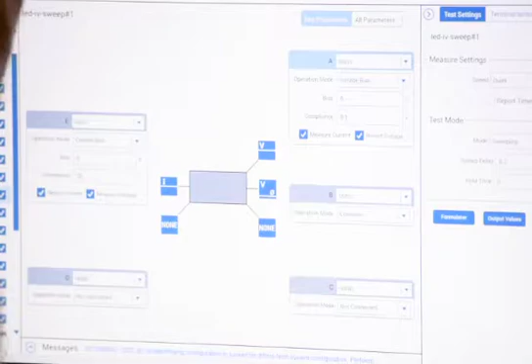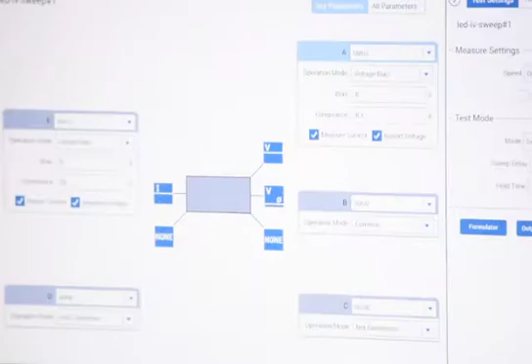So to make an SMU into a voltmeter, you have to source 0 amps. To make it into a current meter, you source 0 volts. That's how an SMU works. It always has to have a sourcing function. So if I want to measure a voltage here, I source a current. So I come here, source current, and I say current bias, and I put it at 0, and now I can measure voltage. Okay, now that's a voltmeter.

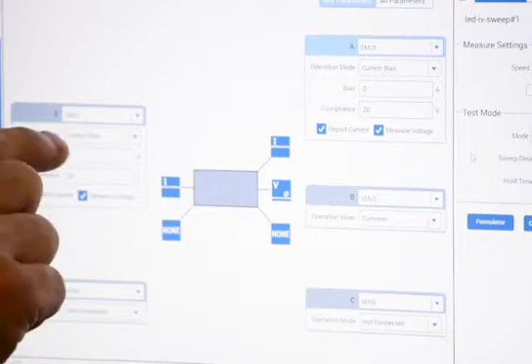And if I set up another pin to do the same, it'll measure them both at the same time. It'll apply your current bias and measure the two voltages at the same time. Perfect. For SMU1, for us, we do source current, right? If we want to inject current. So current bias, I didn't put anything in. We have to put something. It should not be zero. No, it should not be 0. You got to put something in there, obviously.

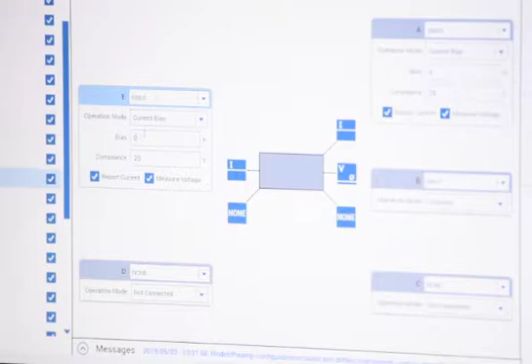You actually want to sweep your current, right? This instrument shines on sweeping. It's a sweeping instrument, okay? Which brings me to a point I want to make because a lot of people don't get this. The fact that it's a sweeping instrument, some of the things you're used to doing, you might have to change your thoughts on. For instance, everybody knows what auto range is, right? On a scope? On any instrument, right?

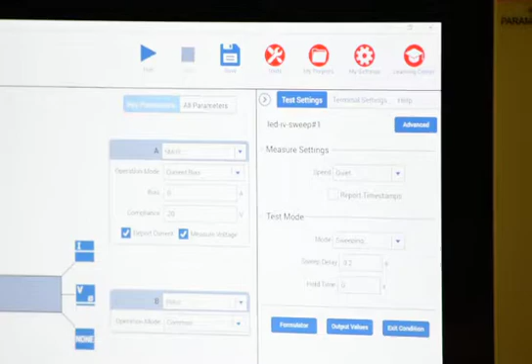Forget about auto range. Auto range is dangerous on a sweeping instrument, because when you're sweeping a measurement, sometimes you're gonna go through a large dynamic range, which is gonna cross over several ranges. The DCSMU has built-in delays that are range dependent. So when you change ranges, your timing changes. And what you're going to see in your sweep is a little blip, and you're going to call me and say there's something wrong with my system. Well, no, it's working fine.

It's that that range change takes time. So it's going to interrupt your nice, beautiful sweep, and give you some artifacts that you're going to think are wrong. They're not wrong. That's the way it's supposed to work. Because the lower the range, the longer it takes to settle the measurement. So there's delays that are built in. It's because of Johnson noise. You familiar with Johnson noise? You're not familiar with Johnson noise?

So what Johnson noise is, any conductor has some inherent noise because of the movement of the majority carriers, usually electrons, in the material itself. Even in a steady state, there's movement of majority carriers in the material. That's noise. And if you're trying to measure small signals, that noise can swamp out what you're trying to measure. So the smaller the signal, the more problem you have with Johnson noise. So you have to wait for the signal to stabilize.

So because of Johnson noise, there's certain measurements you can't make. The Johnson noise line, on the voltage side, is like this. So let's say you're trying to make a picoamp measurement in a picosecond, you can't do it. If you look at a Johnson noise graph, it shows you that it's not possible. So I need to increase the time? It's done for you, for the most part. That's why your sweeps will get messed up because of the timing change as it spans different ranges.

It will change the timing for you mid-sweep, which you probably don't want. Or maybe you do, because there's a consequence to that as well, because the instrument's always most accurate on the lowest range. So if you set a fixed range, you're going to have to set the fixed range at the highest range of your sweep, right? Which means on the low end, you're going to have less accuracy than you are on the high end. Because your accuracy is going to be based on the range you're set on, not on the measurement you're making. It's based off of the range.

So if you look at any data sheet on any piece of equipment, a DMM, a power supply, an SMU, it shows you all the ranges, and there's a different accuracy spec for every range, right? So your accuracy is going to change during your sweep, which you may be okay with, you may not be. And if you're not okay with that, then use auto range and deal with the blips in the data. You just have to deal with that. Or you can break up your sweeps into smaller ones, keep it within the range. Yeah, well, that's what you're seeing. Right? Yeah. Remember some blips. Okay.

So here we have set that to count, right? So the voltage per count. Yeah. So for the current, you should set another column for current to go to the ground, right? Well, it's going to flow from here to there. So no need to. That's another good point.

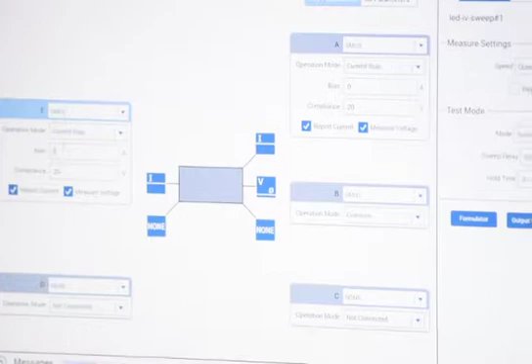Any of you guys use Keithley individual SMUs in the box? Like 2600, 2400s? Okay. That's the one you've used. There's a significant difference between those and this, and you should know the difference. The difference is those are floating. The grounds on those float. So you can put the ground above. You don't have to be on a ground potential. You can put it away from ground, up to 250 volts or some big number.

These aren't floating. Every SMU in this box is common grounded internally. So you cannot do an off-ground voltage measurement. You have to do a differential measurement. So you need 2 SMUs to do that, right? And you have to subtract 1 from 2. Does that make sense? Does it do that for you? You have to set it up.

There's a formulator that you can do the math with, and I'll show you that. The formulator allows you to post-process. It'll give you the 2 voltage readings in a separate column on your data sheet, but then you've got to write a formula that says, take V1 minus V2 and give me another column of that data. Or you can export everything and do it in Excel, but this has got some pretty powerful features. You shouldn't need to do that.

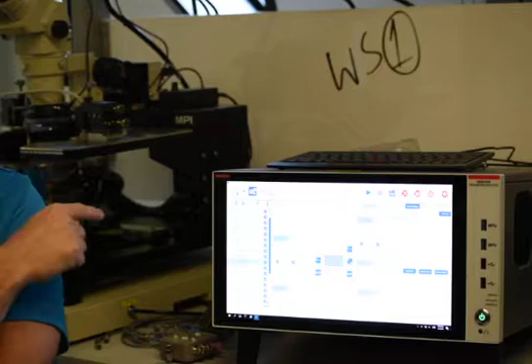The formulator is a very powerful feature that allows you to do a lot of neat stuff. You can find slopes, you can do line fits, you can do linear regression. You can do a lot of stuff right on the machine. Okay, so just make sure you understand that it's grounded.

That's why if you want to do Van der Pauw, anybody doing Van der Pauw? Yeah, we'll be doing some. If you want to do Van der Pauw, you need 4 SMUs to do it. You have to have an SMU on each pin, because you can't just put a ground on it. It's not floating, so you have to reference everything to ground. So you're gonna source a current across 2 points, you're gonna measure 2 voltages and subtract them. That's how you get the voltage across your material. So that's important to understand.

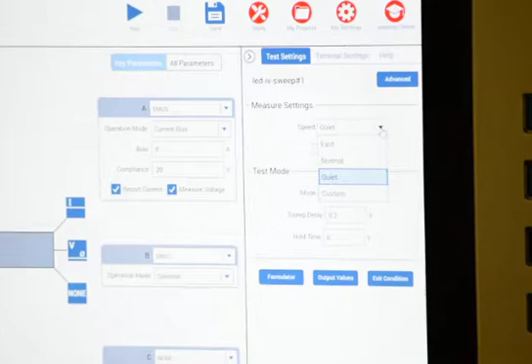Now, we're talking about speed and timing. For speed, we just give you fast, normal, quiet, or custom. We don't give you numbers, right? So there's an important thing to know here in that there's the source measure cycle. We call it an SDM. It stands for source delay measure, and all 3 of those processes have time delays associated with them.

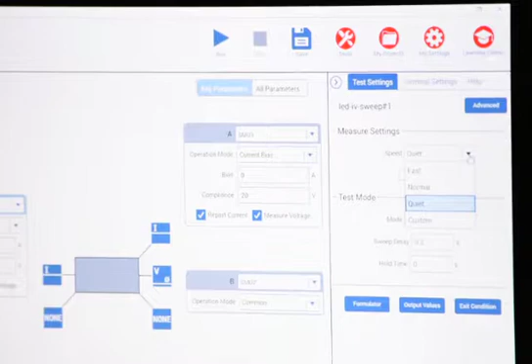The source, for instance, when you set a source value, there's the built-in delay we just talked about. It's range dependent. You can't control that. When you set a source value in a range, there's a certain amount of delay that comes with that. Then the delay portion is your delay. You may want to add more delay, so you can go in there and add additional delays.

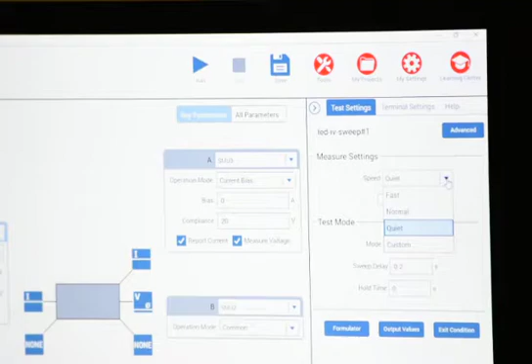Typically it defaults to 0, but if your device is highly capacitive, you might have to wait longer than the default delay, so you can add more delay. And then the measure has another delay as well, and that's what we're talking about here, measure settings speed.

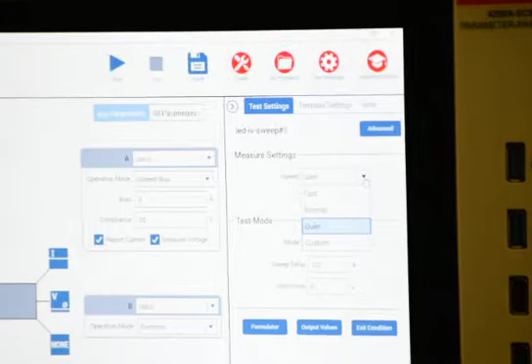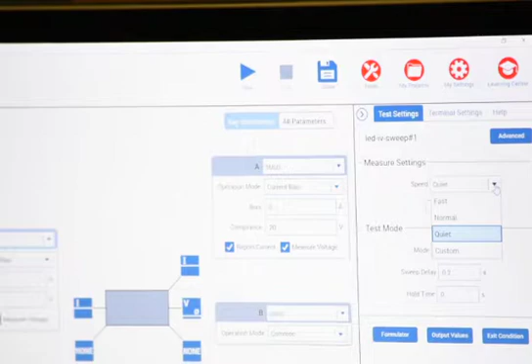So it uses an integrating A to D converter. What it does is it samples at a very fast rate over a period of time that you determine, okay? So we use the power line cycle frequency as the base for that integration. And why do we do that? Because most of the noise in your measurements is 60 hertz noise due to your fluorescent lights, right? So if we integrate over 1 over 60, 20 or 16.67 milliseconds, and we give you an average, we've eliminated 60 hertz noise. Make sense?

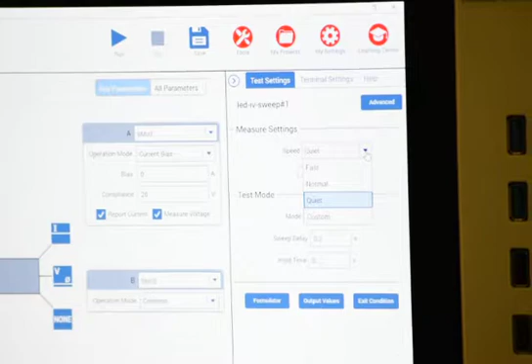Okay, so that's what normal is. Normal is 1 power line cycle. So if you're at 50 hertz, it's 20 milliseconds. If you're at 60 hertz, it's 16.67 milliseconds. So if you want a good, clean measurement, you probably want to be on normal mode, which means that you're not going to get a measurement any faster than 16.67 milliseconds. But you're going to get a good, accurate measurement.

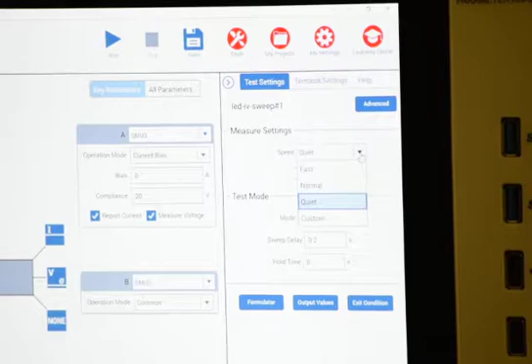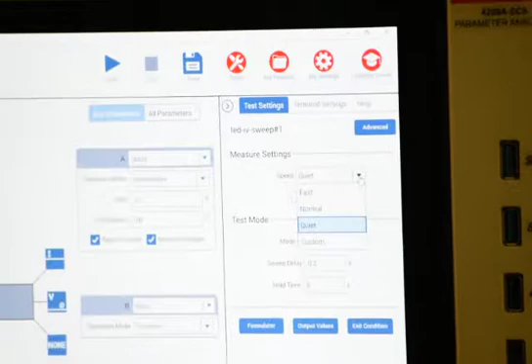If you want a faster measurement, we can set this to fast, and it'll go less than 1 power line cycle. I think it's 30% less. Custom allows you to set any value you want. Quiet goes 30% slower, right? So you've got to understand that's the A to D aperture time for the measurement. That's how long it's going to integrate, because all your measurements are riding on an envelope of noise on your ground that comes through the power line, right? So that's one way we can give you nice, clean measurements.

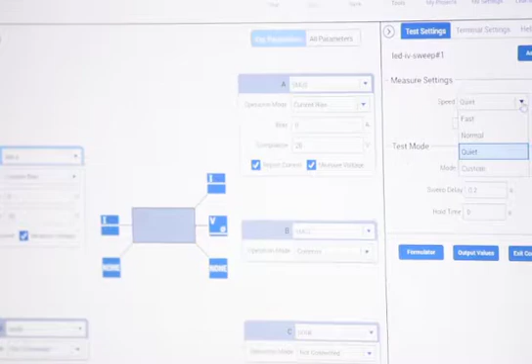The point here is that there's a trade-off between speed and accuracy, and it's just physics. We can't solve that for you. So you have to decide what's your tolerance for noise. If you want a very fast measurement and you don't care about noise, you can set this very fast. You can set the NPLC value to like 0.0001 or some real small number.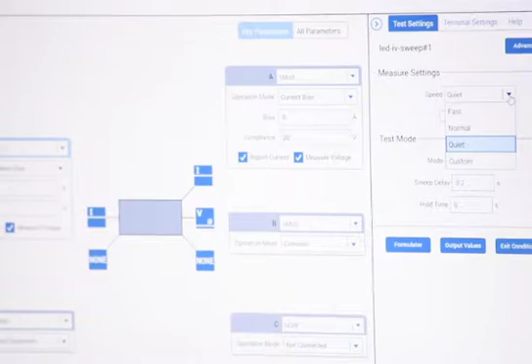And that's like a digital averaging, right? So now you get a real clean, stable measurement, because you can go multiple power line cycles. And that would be the custom one, right? Yes. So my point here is, for the most part, stick to normal. Why would you need to go faster?

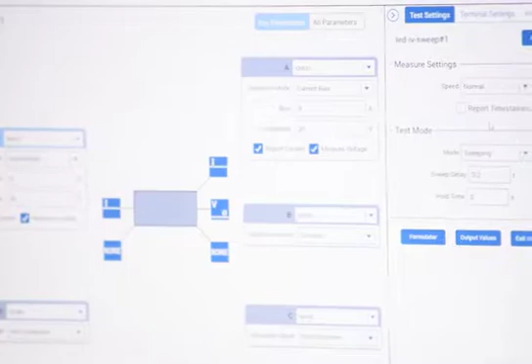What if you're in a production environment and you're on a wafer that's got 100,000 sites and you need to test every site, right? Every millisecond's going to matter in that case. Well, in our case, sometimes you want to check how good your probing is. You just want to really quickly run it, because the measurement is also slow if you don't have a lot of current, if you don't have a good connection.

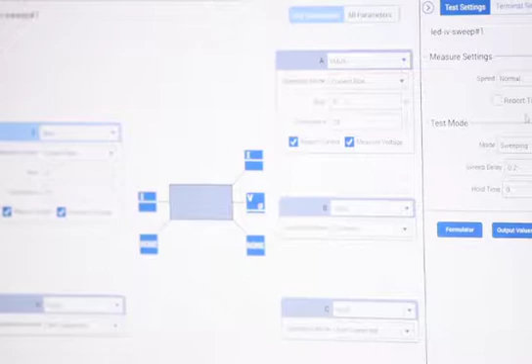Yeah, but in an environment like this, what's the difference between 1.6 milliseconds and 16 milliseconds? Is that going to really matter to you? Probably not. So wait longer and get a better measurement. Well, I'm saying when you don't really make a measurement, when you just want to see, am I connected to the device or not, stuff like that. But you're right, yeah. So you have the patience here to wait a little longer for your measurement, is my point.

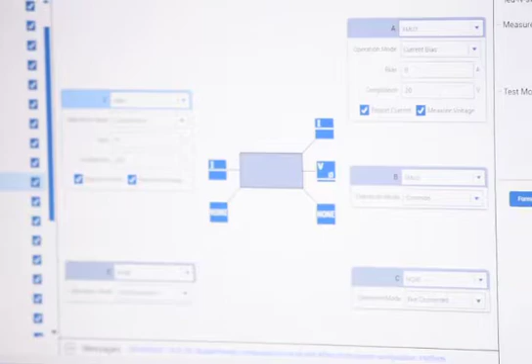Production people don't have that patience. They need everything as fast as they can. So before they figure out their timing, they're going to source a voltage to their device, measure the current over time, watch it charge up, and decide where do I need to take my measurement? Where's the earliest I can take my measurement? And they'll look at the timestamps and they'll put that in. That's what they'll do. Okay.

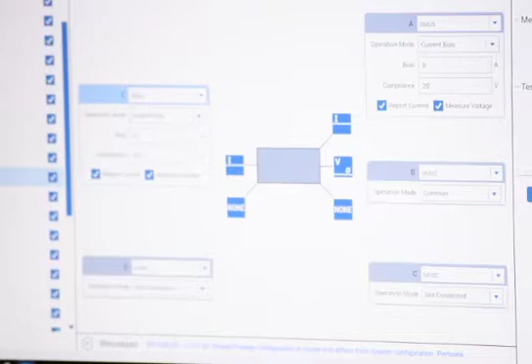For you, just let it go, because the longer you wait, the better the measurement you're going to have, right? Because it's asymptotic. Typically, they say you want it to be within 2% of the final asymptotic value to be considered a good measurement. But you put an edge on a device, the device doesn't see an edge. You know what it sees? It sees a charging curve, and it's not necessarily due to the device. Sometimes it is, but it's due to everything.

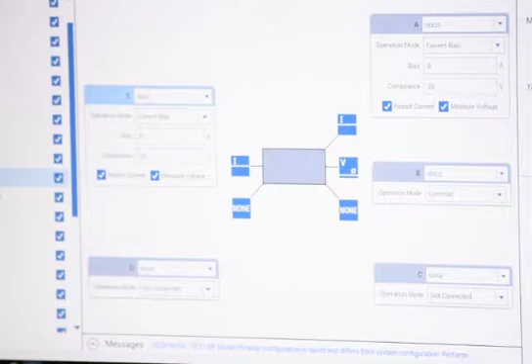It's due to the cabling. It's due to if you've got a chuck. A chuck is a big capacitor, right? So everything that's connected between your hardware and your device is contributing to that RC, the C portion of that RC time constant. That's why I say keep your cables short, right? Because every foot of cable has so much capacitance. The more cable you've got, the more capacitance you've got.

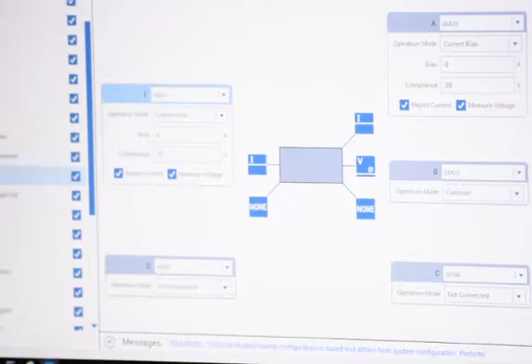I have a question. You said that you also have a problem with the connectors there. So is it better to use a longer wire and connect the probes directly to the SMU, or use another wire and connect them? Here's what's best. You have a remote preamp in the back here. I don't have it mounted remotely right now. It's designed to be mounted remotely.

If you have 4 remote preamps, here's the ideal setup. You've got the CVIV box. All your preamps are in the box. That's your measurement hardware, your A to D hardware. It's in the preamp, not in here. You put that right here, and then these cables go directly to the CVIV box. Now you've eliminated this cable completely, and you've eliminated this bulkhead. That's ideal. That's one of the purposes of the CVIV. It's designed to be put on your table right by your probes.

Most people, when they order probe stations, the probe vendor asks them how long do you want your cables? Oh, give me 2 meters. No, that's a bad idea. You want these to be short. I like to see them this long. You can also take the little black preamp on the back. We provide you a cable that can go between the SMU and the preamp, and you can bring just that preamp on here as well, lay it right here and have a cable this long.

If you're not measuring below 100 nanoamps, it doesn't matter. But if you're measuring femtoamps, attoamps, it does matter. We don't even do femtoamps. Maybe if you have off current of a transistor, then you can bring it out for one SMU, like your most critical one. Exactly, and you just put it there. You only have one preamp, so you would use that one. Okay, everybody understand that? That's the ideal setup.

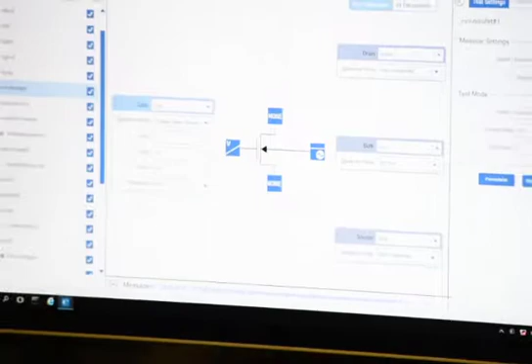So your point is that there's capacitance in everything that you don't want to be part of your measurement. We need to take that out. We need to reference that out. It's a two-step process. Make sure you get that, because a lot of people don't get that. You have to do the compensation. You have to enable the compensation. If you don't enable it, it doesn't happen.

So what you've got to do is go up here to Tools, and you see here there's Connection Compensation, and there's really 4 things that could need to be compensated. One is the cable length, because there's a phase situation here, right? If your cables are different lengths on your CV meter, you'll get a phase error. And if that phase error is greater than 90 degrees, it freaks out. Phase shift. Yeah, you get a mess.

So make sure you always use the same cables that we provide, because this is already set up for those cables. These are 1.5 meters. There's open compensation, short compensation, and then load compensation. Forget about load compensation. You should never need it. You would need open compensation if you're measuring small capacitances, and short compensation if you're measuring large capacitances. So for most people, all you really need is the open compensation.

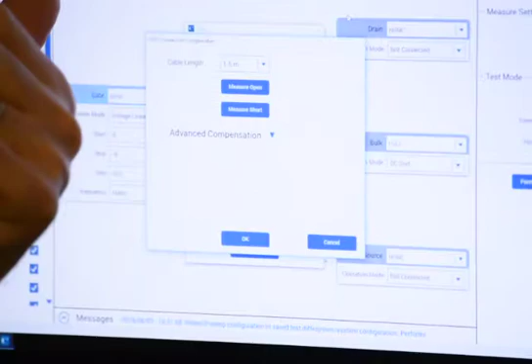So what you would do is have everything connected to where your device would be. You drop your chuck and you run that. So everything's cabled to your device. You're going to measure the capacitance that the system sees without your device being connected. And it's going to go through every range, every frequency, every voltage range on the CV meter. So it takes a little time.

It's going to run through all the ranges, measure capacitance, and store that internally on the card. That's all it's going to do. It's not going to reference that to any of your measurements. It's just storing the values. That's what this does. Once you do it, you should never have to do it again unless you change something.

Open was for low caps, right? Low caps, because the capacitance of your cabling and stuff is going to be low. But if you're measuring low capacitance, it could matter. It could affect your measurement, so you want to know what that is. If you're measuring a large capacitance, it's like a short almost, right?

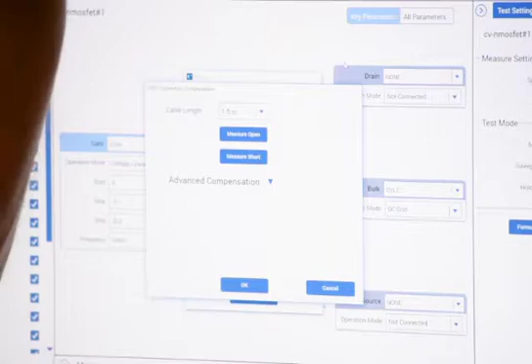So to do short compensation, what you've got to do is short your probes. What you basically do is just drop both your probes on the same pad and run short compensation. That'll measure the capacitance with a short. That's only if you're measuring large capacitances, microfarad type ranges. You can do them all, it doesn't hurt anything, but the short compensation really won't affect your small capacitance readings. So you can do them all, and then you can decide within your test which ones you want to enable.

So now that I've done this, the advanced compensation has the load, where you've got to put something like a 50 ohm load on, which we don't even provide because nobody needs it. Because this goes up to 10 megahertz, you don't need load at that frequency yet. Right. And you want to do this every time you change anything: if you change cables, add an adapter, or add some more cabling.

If you're always set up the same way, you do it once and you're done with it. It probably doesn't hurt to do it every now and then, just to be sure. Something might change. You don't know who used it the day before. You just do it at the beginning of the day. What's cool is do your CV test with the compensation and without. Then you can see the difference. That's usually an eye opener for people.

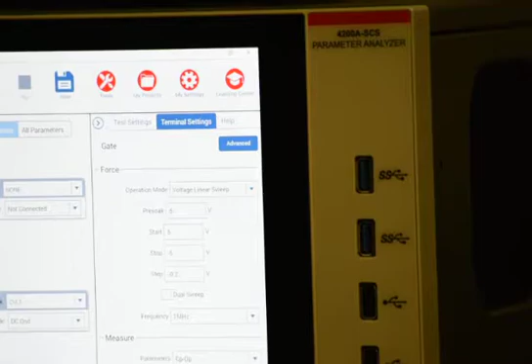So we do the compensation for the CV card itself, and then when we go to the test, over here is where we enable it. If I want to add open compensation to this test, I just check that, and then it will use the values that are on the card. Yeah, before you run the test, you just select open compensation. Does it hurt to just select both, even if you don't always need it, as long as you run them? As long as you run them, you can select both. You're on the safe side. There's no harm in doing that.

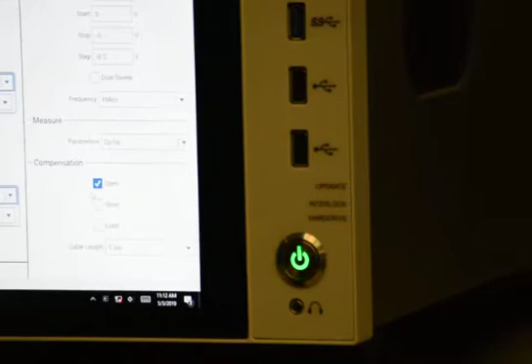Open is open and short, right? So basically you just select both of these, open and short. And then for this test, it will use those stored values that are on the card. If you don't do that, it ignores it. Make sense? And here, if you change cable length, you can actually do that here as well. You're familiar with the different capacitance models.

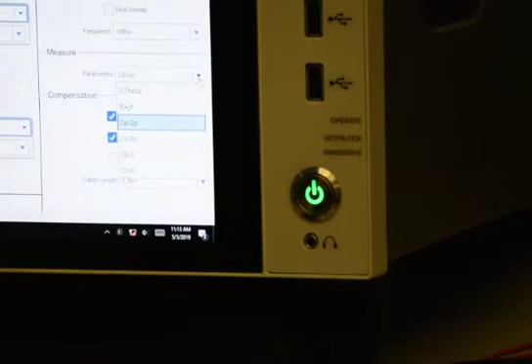This is important because I have customers that are designing MOS caps, for instance, and they'll make a cap structure and do a Cp-G type test on it, and they'll call me and say something's wrong with your system, it doesn't seem right. So what I'll tell them to do is run the Z-theta check, and what we see is above a certain frequency, their phase angle goes off 90 degrees and starts dropping. So what they essentially built is a capacitor up to a megahertz. Above a megahertz, it's a diode. It could be their device, but they don't know it unless they do that test. So sometimes you might have to see that.

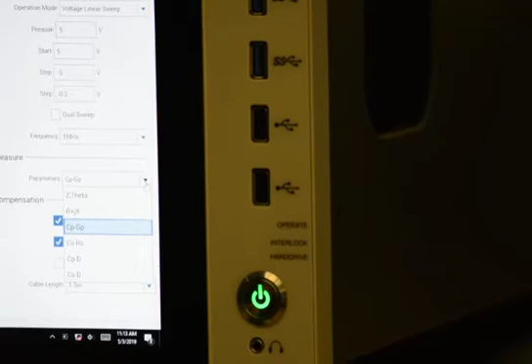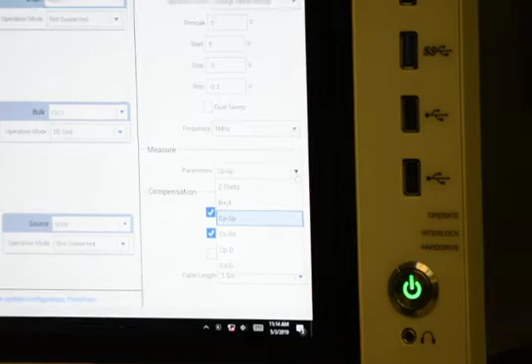You make sure you've got a 90-degree phase shift between current and voltage, and you know you have a good cap. Or you might get inductance, and you can measure inductance as well. We can give you the R plus jX, real and imaginary value. You can calculate anything you want. So any complex impedance you can calculate if you have that. Basically, Z and theta is always right. It's just the impedance it measures, and then you can fit whatever model you want to it.

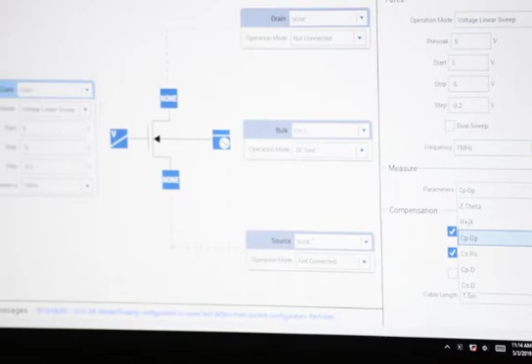The other thing is the dissipation factor is important too, because you know what happens if you've got a high dissipation factor. That means you've got a leaky cap, which means your capacitance measurement is not good. So you should probably do that first. Make sure you've got a low dissipation factor, because if your dissipation factor is high, the results of your other measurements are probably going to have a lot of error.